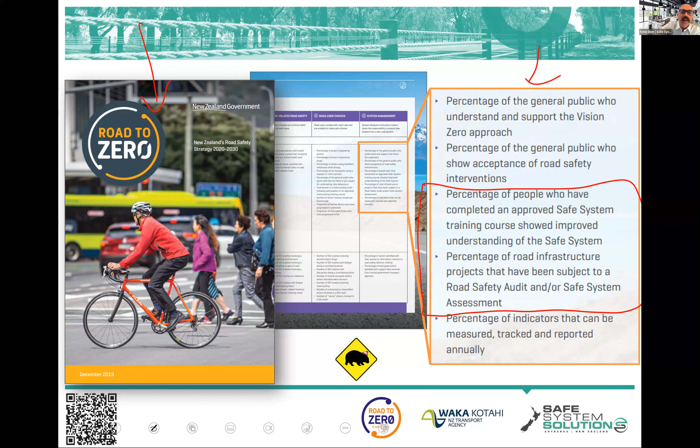A KPI is the percentage of people who have completed an approved safe system training course and showed improved understanding of the safe system. This is one of those, and you're hopefully going to show improved understanding of the safe system. Another is the percentage of road infrastructure projects that have been subject to a road safety audit and/or safe system assessment. Now we've combined those in New Zealand, so essentially subject to a safe system audit. Literally, a KPI for the New Zealand government is how many projects are being subject to this assessment methodology that we're going to be learning. You are then going to be applying it, and you'll be out there doing it on these road infrastructure projects. I'll explain that shortly.

There's a Wally. There's my only help for you in this course associated with Wallies. Wally count is 1. Keep an eye out for future Wallies.

So I mentioned the safe system. You saw it there as a key thing within the New Zealand government's road safety strategy. It's been adopted by local governments across New Zealand. Waka Kotahi operates under the safe system philosophy. But what is the safe system philosophy? Like most people I talk to in New Zealand will say, oh yeah, I know the safe system, and they've got a few key points they can rattle out. But I want to dig a little deeper into this and try to really understand that philosophy, what it is.

To do that, I'm going to take you back in time. We're going to go back to the early days and the first adoption of the safe system in New Zealand, like this time that the New Zealand government said, yeah, okay, we're going to adopt and operate under the safe system approach to road safety.

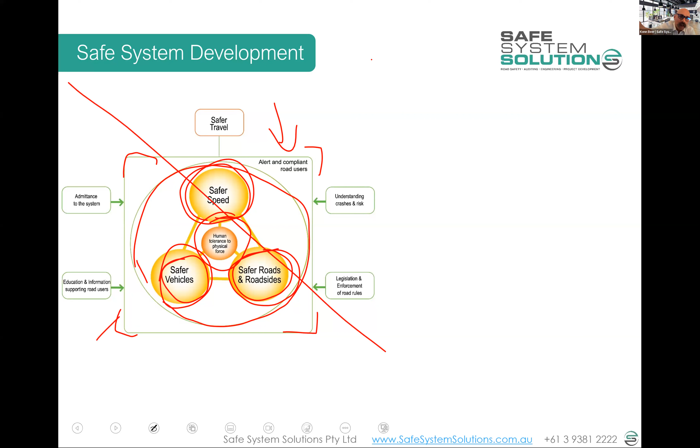So anyway, that got thrown out after a few years, and all of these other ones emerged. New Zealand was on the front foot of this and didn't really accept that from the start, and then we saw lots of other diagrams of the safe system appear.

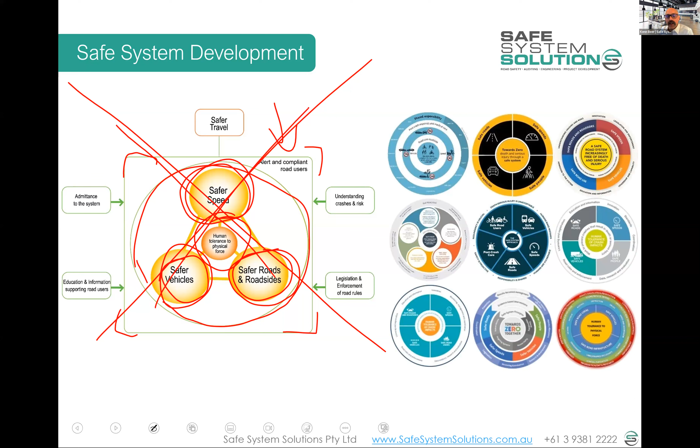I'm going to just talk briefly to the current New Zealand diagram of the safe system approach. I want you to think about the principles underpinning the safe system rather than the specific wording. We do have a little quiz coming up, you're not marked on it, but it's testing you. It won't be the exact same words, but it'll be the principles. Let's have a look at this.

We see the principles around the outside here, and I'm going to talk to these briefly because they are really solid, world's best practice principles of the safe system, or sustainable safety as termed in different countries, or vision zero planning and these sorts of things. But let's call it the safe system here.

We strengthen all parts of the road transport system. We are thinking holistically here about the transport system. But this next one is a big one.

We design for human vulnerability - that is the biomechanics of injury of humans. In this course we're going to delve into that, so you understand different crash types, speeds, angles, road users involved, and what we would expect the outcome to be for those road users. So you're going to become a bit of a biomechanics of injury person and analyst.

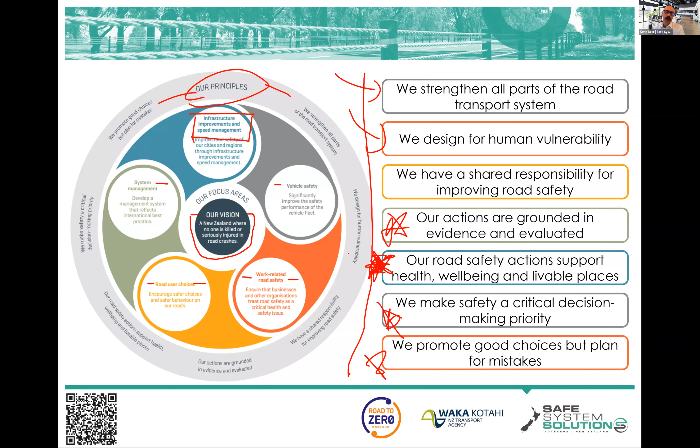Here's a little thing to alter your perspective of your job. Your job has an energy management component to it. So you should be trying to manage kinetic energy in crashes. That's an interesting take on how we do things.

But let's just explore this. I'm going to talk a little bit about safety culture, and then I'll give you some stuff to do. Let's jump out of roads for a second, let's jump to another industry. We're going to go into production of widgets in manufacturing, some sort of widgety something we're making.

Back in the day, it was a pretty open system. They had lots of workers coming in, they'd get kids off the street, give them a bit of training, then tell them to clean the machines. They'd get workers, give them a bit of training, say you do a couple of days of training on how to use this and then you're into it. We'll give you your ticket to work on this machine or whatever it is. But the whole area was quite unsafe.

It had machines that would have open crushing mechanisms and cutting, and we would see people crushed and arms ripped off and the like, and people killed in these machines.

And when they brought people in, they told them it was dangerous. They absolutely said it was dangerous, and said so you have to act safely. It's all about you, you've got to take responsibility for your own safety. That's what we call a pathological safety culture, where it's up to everybody to protect themselves the best they can in an unsafe system.

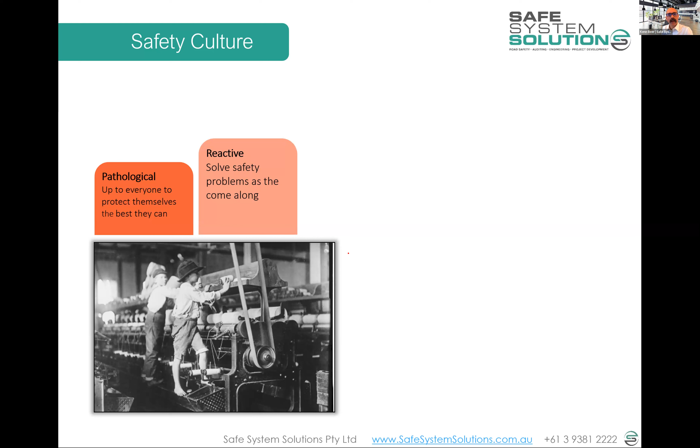Then the economists get on board and review all of these factories, and they say, well, you know what? If we were to implement these safety improvements across all of these machines, we would actually make more money, because we'd have less downtime, less payouts to the families of injured and killed workers, and we'd be able to produce more widgets. And they find this nice balance where you just kill and seriously injure enough that you're still producing what you need, and work out a thing called a benefit cost ratio to find that balance.

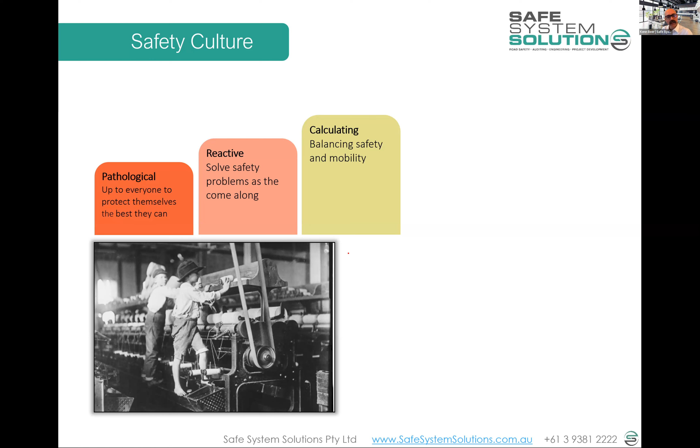Then you step up from that in a safety culture ladder to what we call a proactive safety culture, where it says, well, no, we need this very high level of safety, and we will allow you to produce widgets up to that safety performance level. If you go more unsafe than that, your risk goes above what we've deemed the very safe level, and production will stop until we're brought back into that envelope. And then you need to maintain that high level of safety through maintenance of the equipment and systems, but also maintenance of the culture and the like.

Now, if you look at the way we operate the road and street transport system in New Zealand, from a safety culture perspective, we really have elements of all of this. We've certainly got an abundance of pathological safety culture, where we're giving licenses to young people and saying it's dangerous out there, you've got to act safely the whole time, safety is your responsibility, right? And we're sending them off into an unsafe system, with them being the ones we say are responsible for safety.

Okay, we have reactive, and we certainly have been treating a lot of areas that have crashes, and we continue to do that. Calculating is in there, and that's very much entrenched in decision-making culture in New Zealand around road transport - this idea that we have to kill and seriously injure a certain amount of the community in order to move people and goods around the network.

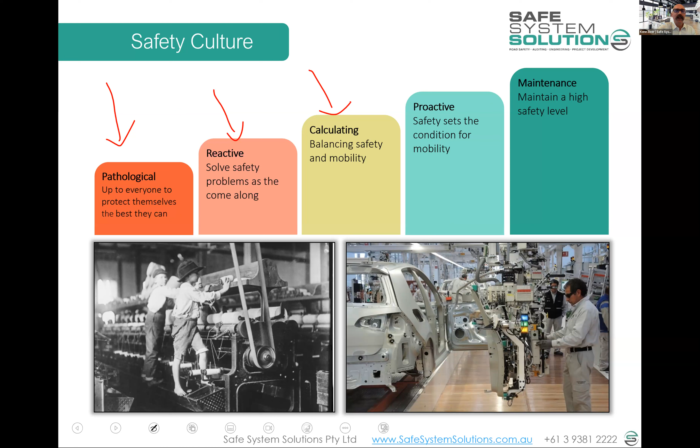Well, you want to sort of counter that, and there is a lot of countering that coming about in saying, well, no, we need to move people and goods around, but we can do that safely. There are proactive elements in there. We're seeing more and more emerging, and that is really where Safe System sits - in this proactive and then maintaining culture.

We see things like new motorway roads have continuous barrier systems throughout the roadside and median for the full length of it. It's not calculated on a BCR perspective. It's not waiting to see where people run off the road or have head-on crashes and putting short lengths of barrier in there. No, it's saying from the start, we need it to be inherently safe from that perspective.

And that's what happens, right? If you ran a traditional BCR economic analysis method over that, it probably wouldn't come out well. But I always give the analogy of a new high-rise apartment building with balconies - you don't build that and then just wait and see where people fall off and then put a bit of railing on those balconies, or go, oh well, actually it's higher risk on the outside of the curve of the balcony, so we'll just put the railing there. No - it just says it's unsafe.

Without railings, we put railings. And that's the sort of proactive safety culture we're looking for. So there's good stuff there.

Back in the day, school speed zones were very much proactive. You run a standard economic analysis on school speed zones - they're a disastrous investment in an economist's eyes. They're just bad all round. There's just nowhere near enough kids killed or seriously injured in their minds. But how grotesque is that?

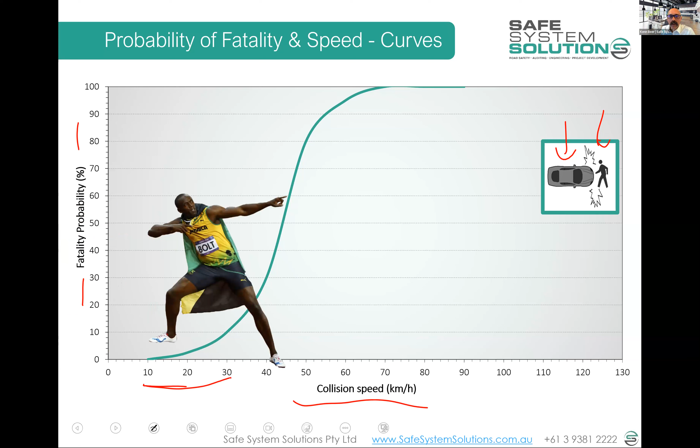So this is a graph for all community levels, and passenger vehicle striking pedestrian. You can see there around 10, 20, 30 kilometers an hour, most of our community will survive when struck at those speeds. It's not going to be friendly, but they should survive. A great man, he comes up a little higher on the curve because he's built like a fridge and can withstand some force. But you see it sort of exponentially goes bad for our community around that 30 kilometers per hour - it gets really bad really quickly after that point.

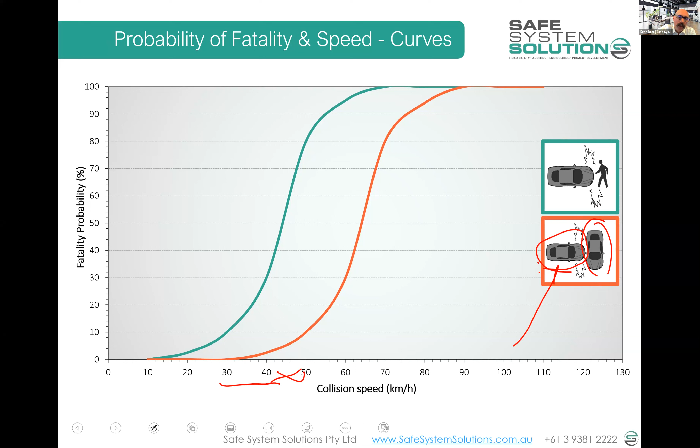For side impact, right angle, we talk about that vehicle as the bullet vehicle - the one that does the damage in a crash. This is the target vehicle. So bullet vehicle speed down here, we see around 30, 40 kilometers per hour when we get that right angle T-bone crash, it's generally survivable, even up to around 50. As we go beyond about 50, it gets really bad, really quickly, with huge increases in the proportion of our community killed as a result of those higher speeds.

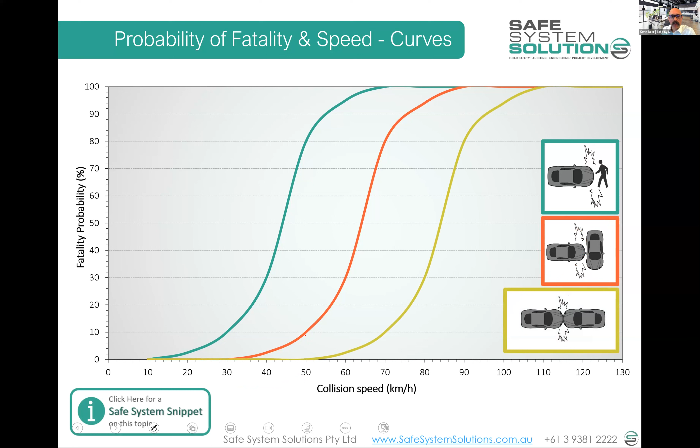For head-on crashes, we see that around 50, 60, 70 kilometers per hour, which is the speed of each vehicle, sometimes people say to me, oh, so it's 70 kilometers per hour, that's 140 kilometers worth of force. And I'm like, no. Well, only if you were standing in the middle and they squashed you, or only if you're in a tiny smart car and a massive truck hits you and pushes you back. It's a 70 kilometer per hour crash.

It's the same as running into a brick wall at 70 kilometers an hour, in the sense that assuming these are same mass, same speed vehicles and they hit head on, the occupant of those vehicles goes from 70 kilometers an hour to 0 in that short space of time. There's a good Mythbusters episode on that, crashing cars into each other and into brick walls with accelerometers, proving that point.

Now, in the PDF slides, which you can get from the Learning Management System, as Loretta's going to show you near the end, you could click on any of these little safe system snippets, it takes you to a link and gives you more information. Sometimes there's videos to go with it. If you're interested in delving into this a bit more, we point you at that.

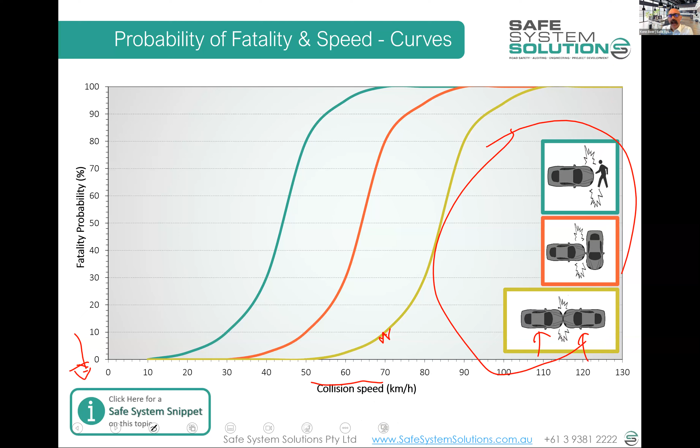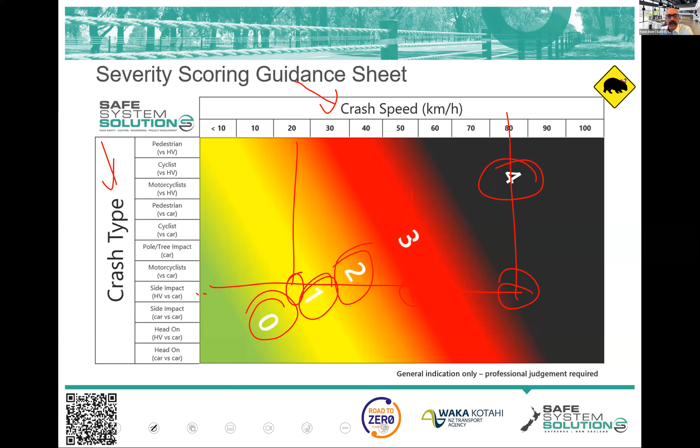I'm going to give you a break shortly. I just want to cover off another couple of things here. This one.

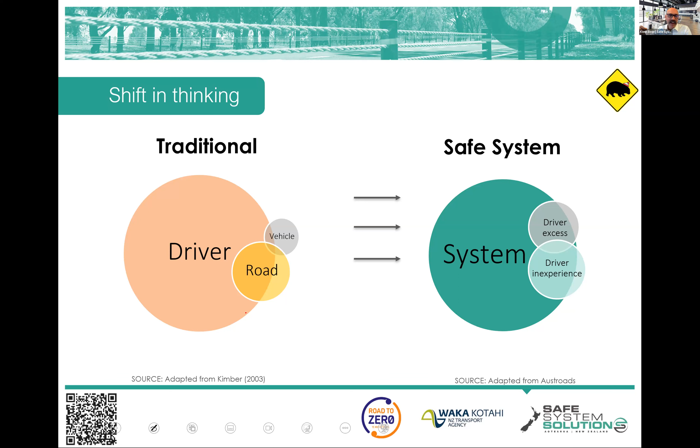Now, there are bubbles here that Austroads put, it's adapted from Austroads, which were these driver excess, driver inexperience, and bits sitting outside. Now there's another area of debate, like okay, if somebody drives at 200 kilometers an hour through a residential street, is that even something within our system? I would just say it's a system failure. How on earth have we let a car be able to do those speeds in those areas? That's insane. And the technology is there to stop that happening. That's, technology is not the issue. It's sort of like a mix of sales and marketing and public opinion and all of these weird little nuances.

But from a very simplistic perspective, we could make it so that absolutely just can never happen. It can't happen, the vehicles will not let that happen. Driver inexperience is like not having the absolute basic function of how to use a vehicle that you're using. No, and we're not talking about anything advanced here, just absolute basic function. But we want to think about system failures, and what can we do to address the system?

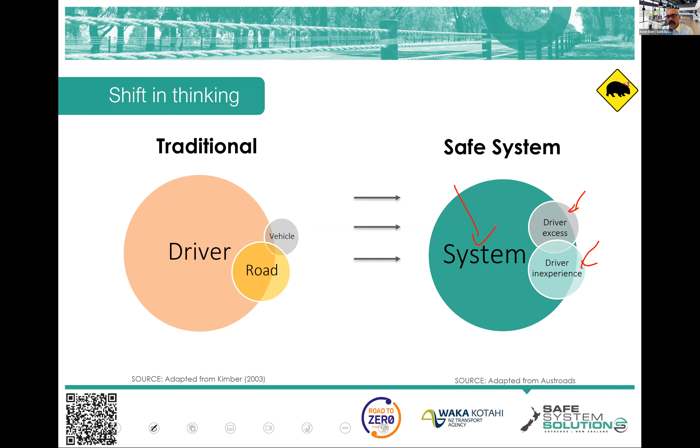Within that, we talk about slips, lapses, mistakes, unintentional violations, and deliberate violations.

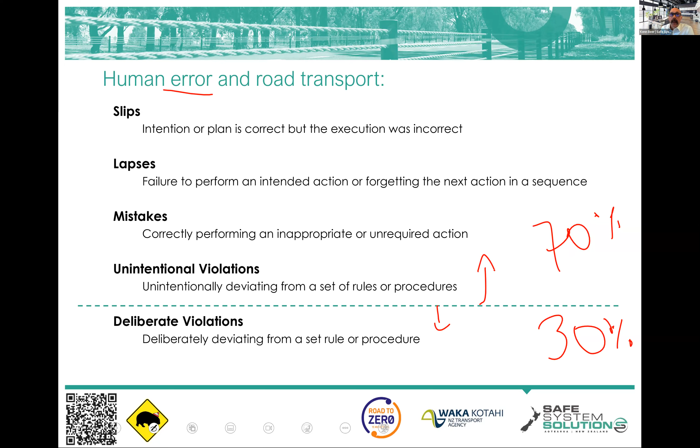I think there might be a question that's come in. Is deliberate include drink driving, etc.? Yeah, this is where it gets a bit nuanced. I think they drew a line at some sort of intoxication level, which was not just a bit over, which is up for debate. So a bit over seemed to be within what they categorize as above the line. And texting was also above the line. So whether that's a premeditated, deliberate violation is unknown. I think in the report, it was sort of like, the predominance of texting and the way people, when the text goes, the human urge to look at it is not considered a deliberate violating act. So it gets into some interesting details, lots of psychologists and human factors experts weighing in on those reports.

But the core of it is that there's a huge amount we can do just within the design, operation, and management of the physical infrastructure and the way we operate a road and street network that can have massive changes for everyday New Zealanders going about their business. They'll never know, but it can.

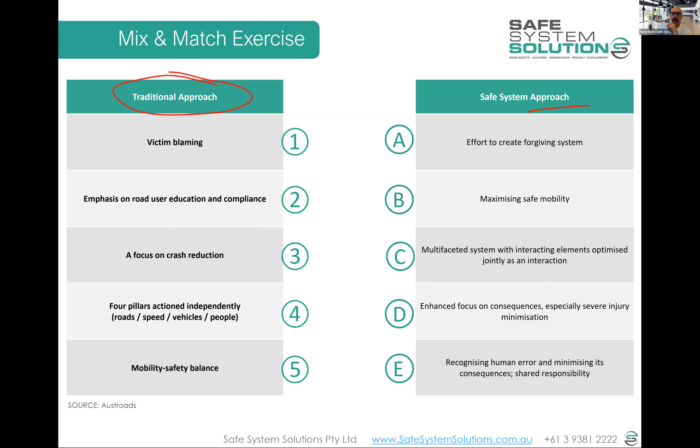Victim blaming, well we now, people won't say they were victim blaming of course, but where we were just able to point the finger and say there was a minor lapse in concentration and that caused it, or whatever it was. It's more recognizing human error, minimizing its consequence, and that shared responsibility. Emphasis on road user education and compliance, it's not being ignored, but it's more focused now on that effort to create a forgiving system. So crash reduction, we're thinking about the consequence of crashes and severe injury minimization. We had this very siloed 4-pillar approach: the roads, the speeds, the vehicles, the people. It's really understanding there's this multifaceted system, interacting elements, and we want to optimize it jointly as an interaction. That's a bit of a mouthful. And mobility safety balance to maximizing safe mobility, that's a little bit like that factory widget analogy I was giving, where we say, no, the safety sets here, and then we will maximize mobility within that safe envelope rather than balancing off.

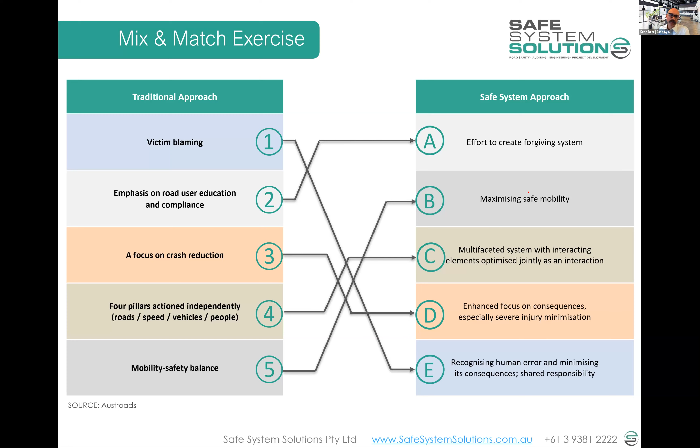Okay, let's have a quick little pop in here of some things. I'll give you a little bit of background on this. And sorry, I'm just checking where we're at.

Okay, I'm going to have to speed up a little bit, but that's okay.

So this is a central flexible barrier system in a narrow flush median, as you can see - a pretty newly installed system. It's 2+1, meaning 2 lanes in this direction, 1 lane in this direction, and then that'll swap at some point, so you've got that overtaking opportunity. This job took an extraordinary amount of time in planning, design, and development, because they kept hitting these hurdles and barriers - things that people said you can't do, for one reason or another.

Let's do a little bit of typing into the chat. What do you think some of those blockers, those hurdles, those reasons people put forward were for why this project to add this central median barrier in the flush narrow median - why they said you can't do it on this road? It was just a road that was basically 1 lane in each direction with occasional overtaking lanes separated by a center line, and this was the change they were making. Pop it into the chat - any ideas on what those challenges were? People were saying, you can't do it, I don't want this.

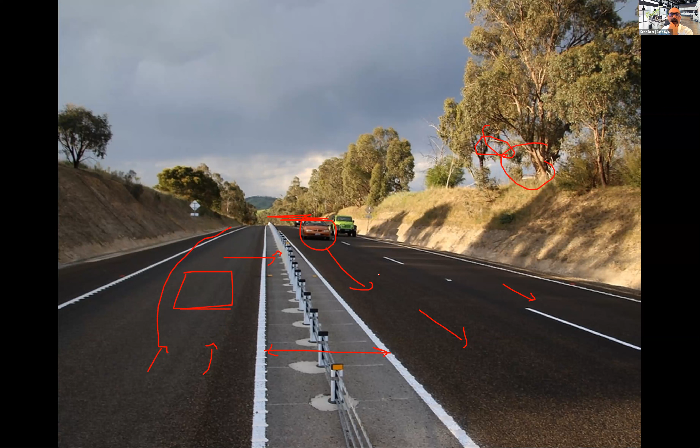So lots and lots of issues - enforcement: if this car was driving fast and the police car was on this side, how would they get to them? What if the house over here was on fire - would the fire truck have to go all the way around? The posts and motorcyclists - the list goes on and on. And you've identified a few of them, but there were many of them.

The thing is, this still isn't something that's done commonplace, so people aren't used to seeing this, and change is always fearful for people. So we see a lot of this come up. Our job is really to think about how we can facilitate this, because this is going to be a way, way, way safer outcome for our community.

One of the things we've discovered is that a traditional road safety audit actually caused more issues for these projects in a lot of cases, because a road safety audit's only mandate is to identify safety issues with the project once it's built, with the design. So all the road safety audit was pointing out was the risks - maybe a motorcyclist hitting this, the deflection of the barrier slightly into the oncoming lane, little bits and pieces like this. The audit's job was never to say, overall, this is a wonderful safety project - that's not the job. So we ended up getting reports that were kind of hampering our ability to implement these sort of things.

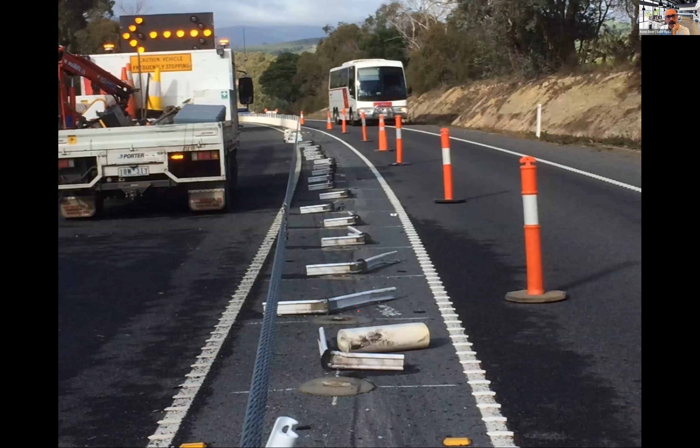That one did get built, of course. Then it got hit, because, you know, people leave their lane. And that was a really interesting one.

Somebody called up the regional office. They wanted to speak to the engineers that put this in, and they were expecting to get shouted at, as you usually do, except this person just wanted to thank them because they're pretty sure this barrier saved their life. They'd been driving this road for 40 years, they said, and it never had a barrier in the middle. This time it did.

Somebody came directly at me, and so they managed to capture that person and give them to the comms team. They made a little video of it, which we're going to put into the learning management system. You want to watch a little 2-minute video that talks about that, it's pretty good, it's pretty nice. It's very rare we get thanked for the work we do, because people don't know that they've been saved. But in these cases, they do.

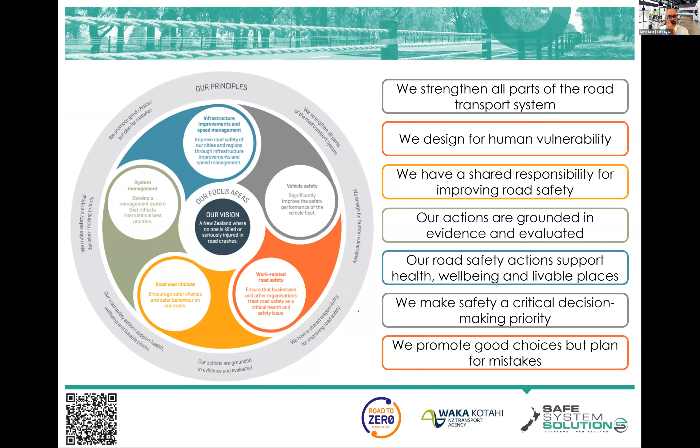So a couple of little things from me here as we go through these principles and elements of the safe system. The vehicles are playing a huge role in safety, right? We're seeing better safety features coming into vehicles, different star rating systems, and mandating of different safety features. Admittedly, the New Zealand regulations are lagging significantly behind a lot of the rest of the developed world, and I think there's a lot of improvements that can happen in that space. But we do know the vehicles are playing a pretty good role, and you can see some crash testing and vehicle safety features implemented into the vehicles which are proving pretty good.

But I do want you to be aware of the limitations here, for us as infrastructure people to sit on our hands and say, no, the vehicles are going to solve all these issues, we don't need to really change anything. Yeah, that's not quite right, on a number of levels. One is just to understand the limitations of vehicles.

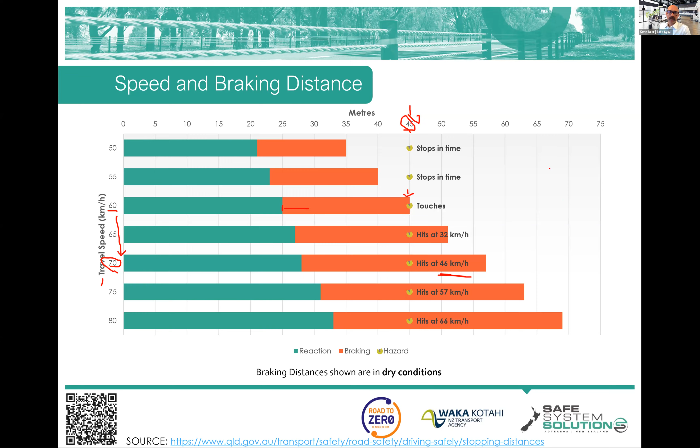And when you add into that those exponential charts we showed of the biomechanics of injury at different crash speeds, and you overlay both of these, we discover a fourth power relationship between speed and fatal injury outcomes, and a third power relationship between speed change and serious injury. So if that doesn't quite make sense to you because you were asleep in year 11 maths, that just basically means that small increases in speed magnify significantly to the highest level injury outcomes.

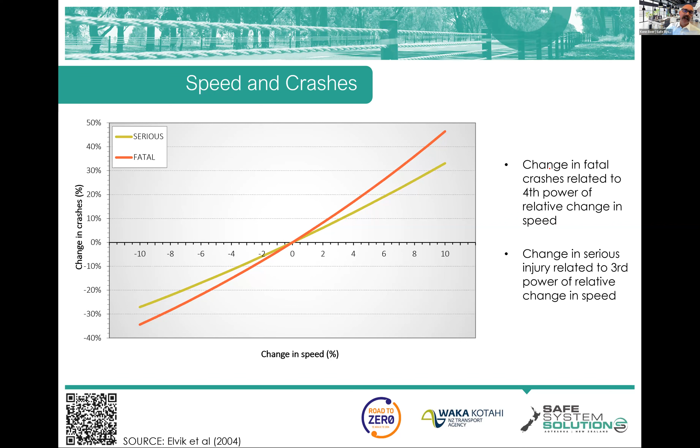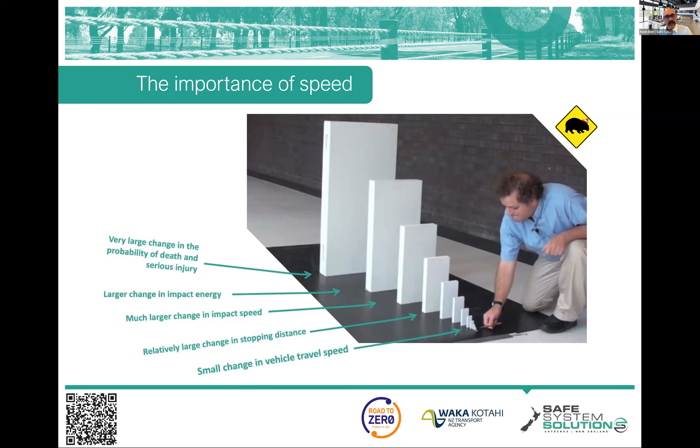I was updating the Austroads Guide to Road Safety Part 3, which is speed and speed management, and I chucked in this diagram just to illustrate the importance of speed in the overall safe system perspective. Basically, whatever road transport network you've got - whatever the roads, whatever the vehicles, whatever the people - you can have a safe transport system as long as you filter it through the correct speed.

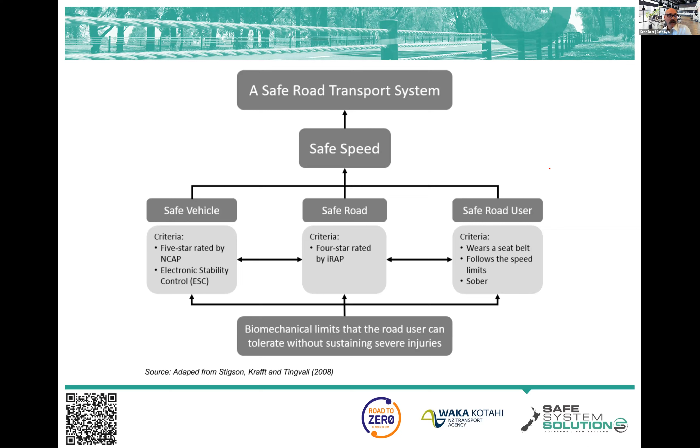You can have really bad cars, drivers who aren't wearing their seatbelts and other things, poor roadside infrastructure and the like - filter it through a low speed and it's safe. Conversely, if you have a really excellent vehicle fleet with high safety features, wonderfully designed roads that cater for this with great energy absorbing characteristics and no dangerous locations, and road users wearing their seatbelts, you can filter it through a very high speed and still have a safe transport network. In fact, racetracks are a very well aligned safe system environment, like car racetracks. Anyway, just the importance of speed.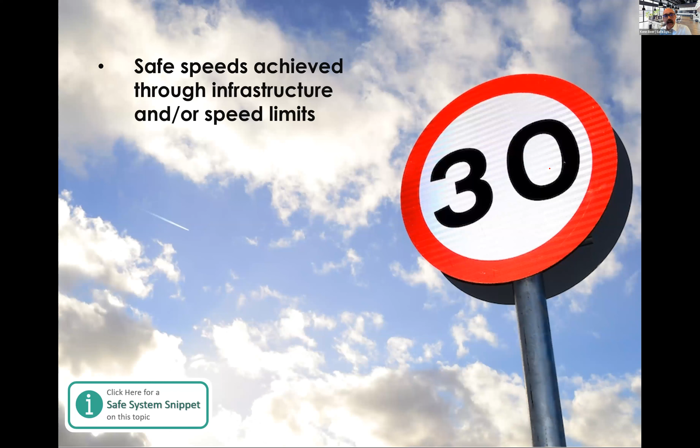Safe speeds, though, we can achieve through infrastructure and/or speed limits. Explaining why speed limits are in place can assist in their acceptance and compliance - that's an interesting one. Protection of vulnerable road users is generally well accepted. Urban speed limits are generally an easier thing to do - still hard, but rural environment speed limits still cause challenges, as they are playing out very much in New Zealand at the moment, with some political challenges, as you're all very aware of no doubt.

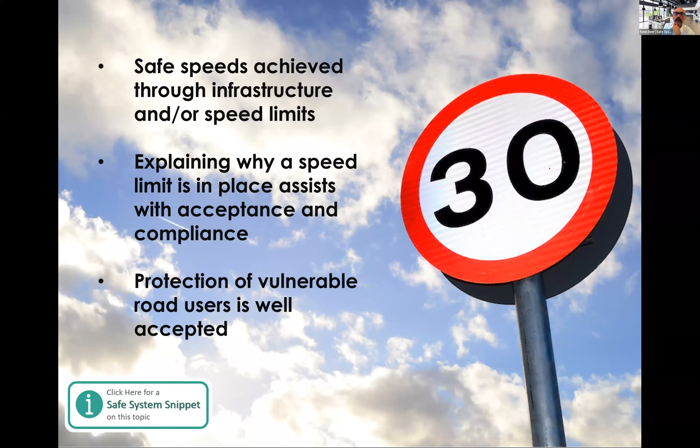But we are playing out this interesting space where we're managing speed, and we have some technology that we can use - so site-activated speed limits on major roads. These are RIAWS, sometimes called rural intersection activated warning signs or speed signs, where a speed limit activates only when there's a vehicle coming out of a side road or entering into a side road - so only where the risk, the conflict, is present at that time. I think these sort of things are a stepping stone into more appropriate speed management across the network.

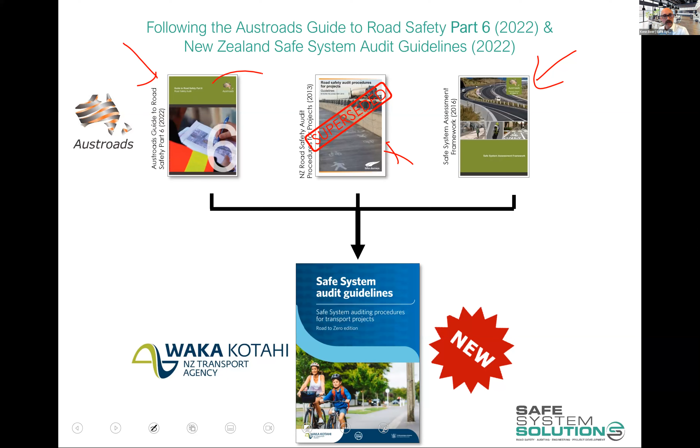So we also had the Safe System Assessment Framework, and then there's the old 2013 Road Safety Audit Procedures for Projects, which is the old New Zealand audit guidelines. So taking bits of each of these, and a few other little bits and pieces, we created the Safe System Audit Guidelines, which actually does, in my opinion, jump ahead of the Austroads document, and it's a really nice process. A safe system audit is this overarching encompassing of a road safety audit and a safe system assessment.

So what we're going to be teaching you is really how to do a safe system assessment, and then how to do a road safety audit, and then how to combine those into one package. You'll be able to do both a safe system assessment and a road safety audit, and combine them as a safe system audit. I apologize if terminology is a bit confusing during this transition, but I'll refer to safe system audit, which really includes a safe system assessment and a road safety audit.

So a common misunderstanding of a safe system audit is that it's a check against standards. That's not what it is at all. I shouldn't say at all - you might check if it's meeting standards and guidelines, but there's plenty of things that meet standards and guidelines that present death and serious injury to our community.

We could have standards and guidelines that are old. We could have standards that have never been thought about in the context you're about to put them in. We could have combining standards and guidelines together - as isolated things they're fine, quite safe, but put them together in the same spot and oh my God, we've got a dangerous situation. So there's a whole lot of reasons why just meeting what is documented may not be safe.

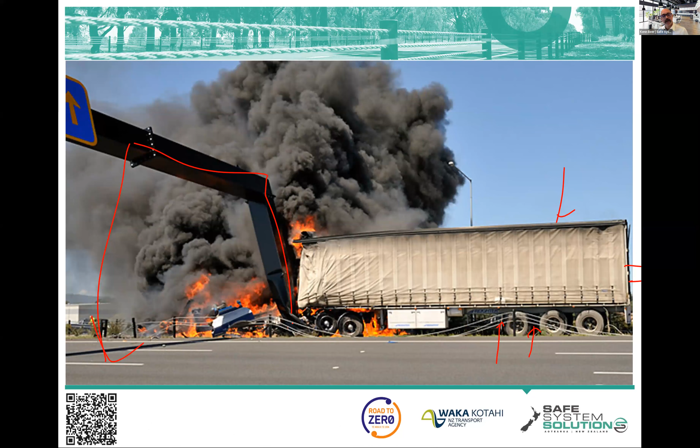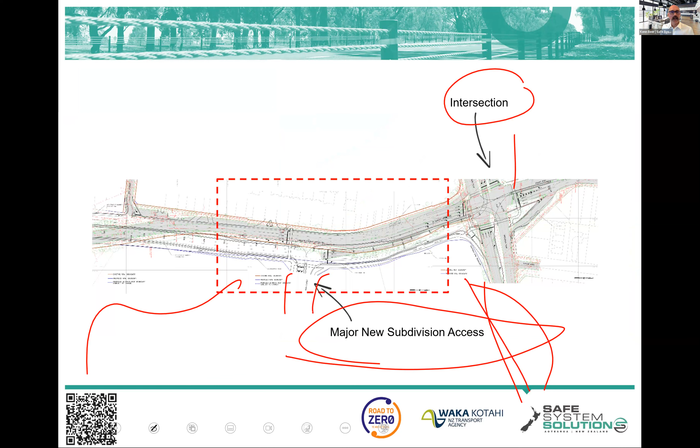Here's another example. So here we've got a new duplication happening and a really big new major subdivision happening all down here - it's huge. Not across the road, but yeah. I'll zoom in on this a bit. You can see there's an intersection up there, existing, and a big new access road in here to the new subdivision, which doesn't exist at the moment. So let's zoom in on that.

So you can see here Main Street, and they're signalizing here. You can see if a vehicle is traveling along here, maybe it's a 60 zone, maybe they're going 65 or something, ticking along and continuing along straight, wanting to continue straight along here, and oh, whoa, I'm in a right turn lane. That's what we refer to as a trap lane - wonderful naming of that, whoever named it, because it's exactly what you feel.

You're driving along and all of a sudden you're in the turn lane. You don't want to be in the turn lane. You didn't move into a turn lane, you're trapped.

We know very well that we're going to have sideswipe and rear end crashes around here. Does this contravene standards and guidelines? Well, not really. It's discouraged, but it doesn't say you must never build a trap lane, because these jobs are super hard. They're dealing with services, properties, constraints, traffic modeling, cost implications, and you name it. Super hard to build and design something like this. So the designer here would have known they're building a trap lane, but they're going, well, I can't, I'm stuck here. I have to do it because I can't afford to widen. I've got this and all these other constraints, and on balance, I'm just going to do it.

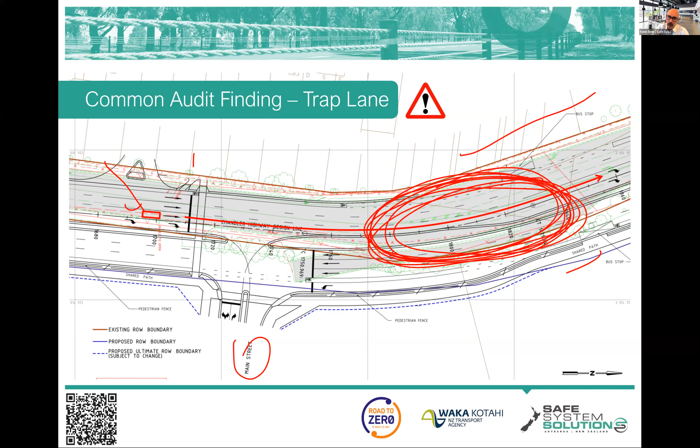Okay, I'll play it once more, or a couple more times. I'm seeing some good answers coming in already. We've got a group of natural safe system auditors, I think. I'm seeing some really good answers coming in here. Everything I'm seeing in there is worthy of investigation, and you can hardly ever do this.

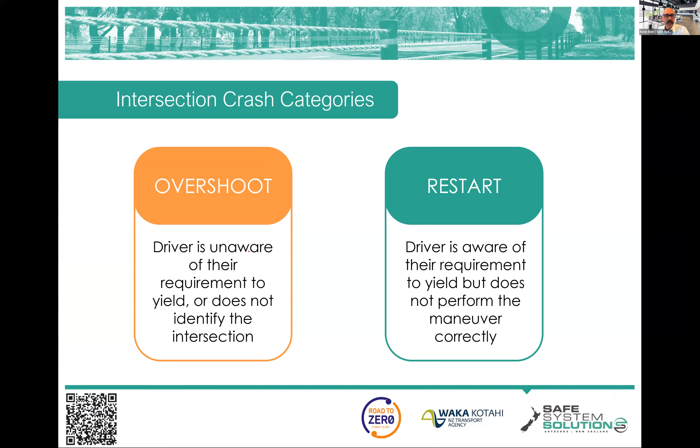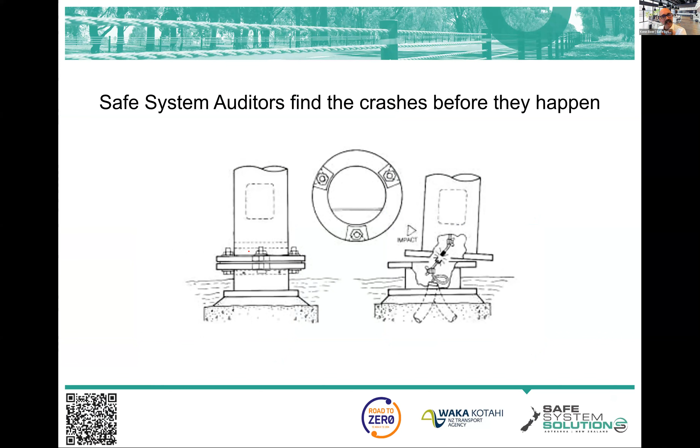Now, overshoot and restart are categorized for you in your notes—I've already explained those. But we saw the slip-base pole here. That light pole was designed to break away on impact, which lessens the severity of the incident when it occurs. So slip-base poles are pretty cool—they do an amazing job in terms of breaking away when struck.

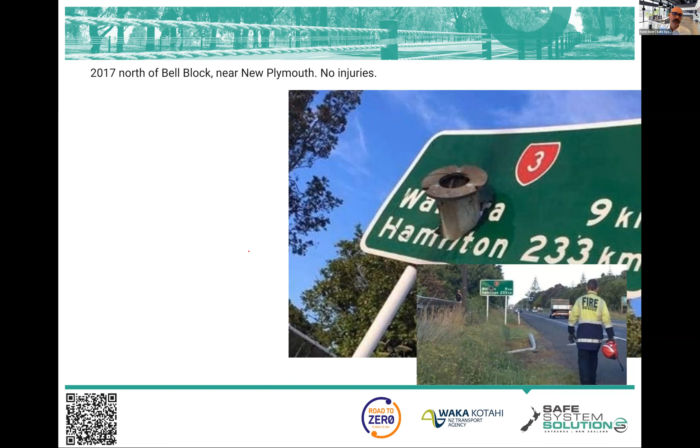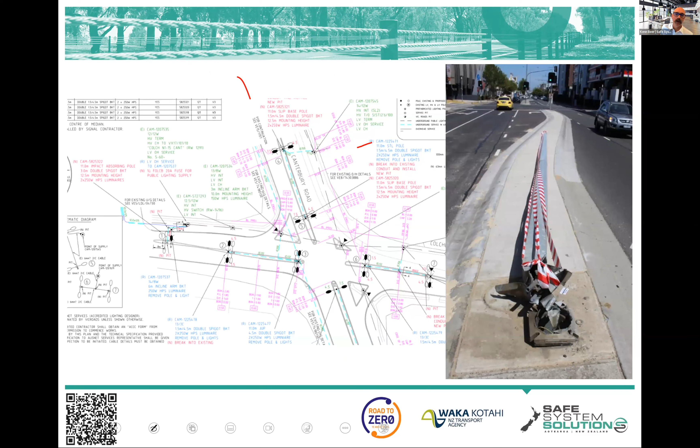So there's good safe system in action. As an auditor, you might be given designs that include decisions on light poles—are they going to be rigid, or are they going to be slip-based? You might see this sort of stuff and have to read into the details to work it out, or make sure you're with people in your audit team who can help you understand what they're going to build, so you can ask logical questions.

If we were in this environment with these light poles, and we were worried about vehicles leaving the road and hitting them, what if we decided to make those slip-based, breakaway on impact? Could there be any other issues with that? We're here in an urban environment—though I think this is during lockdown, so it's actually quite quiet. Someone mentioned pedestrian strikes, absolutely, well done there—we need to think about where the pole will fall, and it could fall onto other road users.

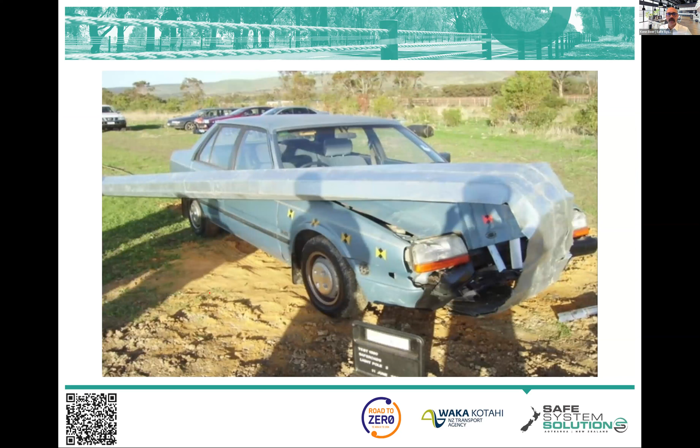So the rule of thumb is that on high speed roads you wouldn't use rigid poles, you'd use slip-based poles. In low speed urban environments with pedestrians and lots of activity around, you'd use rigid poles, because the speed of vehicles shouldn't be high enough to create that energy transfer to the road user. In between, there's another type of pole called an impact absorbing pole—it crushes and contains everything within an envelope, so these can be used in medium speed environments. On the left in the video here is an impact absorbing pole.

It's probably a higher speed environment than I would use an impact-absorbing pole. I think it's interesting, but it shows you how it works. It hasn't fallen onto the carriageway, it sort of folds back on itself there.

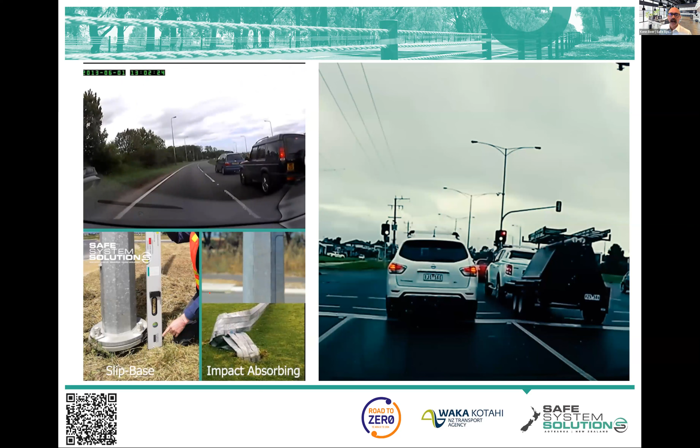Impact absorbing. On the right here, we're seeing a slip-based pole. So the whole thing will come out and come down, and you can see how that falls.

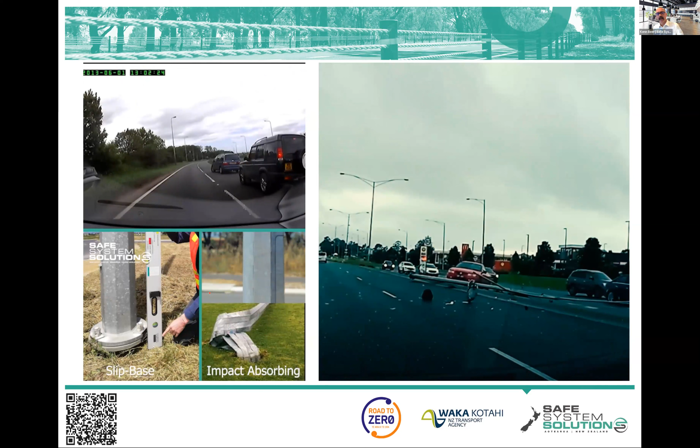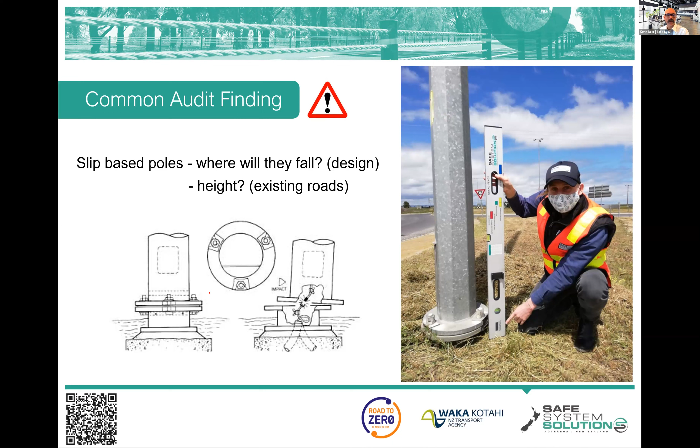So as an auditor, we will be looking, in a design, what are they going to use? Where's it going to fall? Is there danger for the occupants of vehicles? And then the existing roads or post-opening audits or the like, we'll be looking at things like the height. Okay, they've put a slip-based pole in. Is it the right height? If it's too high, vehicles are just going to snag on it. And if it's too low, it kind of just doesn't quite function the way we want. It's not as bad, but...

Okay, so a safe system audit, it's defined in the safe system audit guidelines, which are on the Waka Kotahi website, and we're putting them into the learning management system. But it is a formal, robust technical assessment of transport safety.

So it's a risk assessment. It's done by independent and qualified teams. So you can't audit your own design. You can't audit the design that you're the project manager of. Right, and you have to be qualified - you have to have done this course and have that qualification.

But we can do these safe system audits at different stages along a project. You can do it at the early stages when it's a concept design, they're just starting to design things up, or they've got a bit more design, a bit more meat, preliminary. At the details stage, you can do this sort of process during roadworks, although there's some other stuff associated with that, and post-construction, so pre-opening or post-opening.

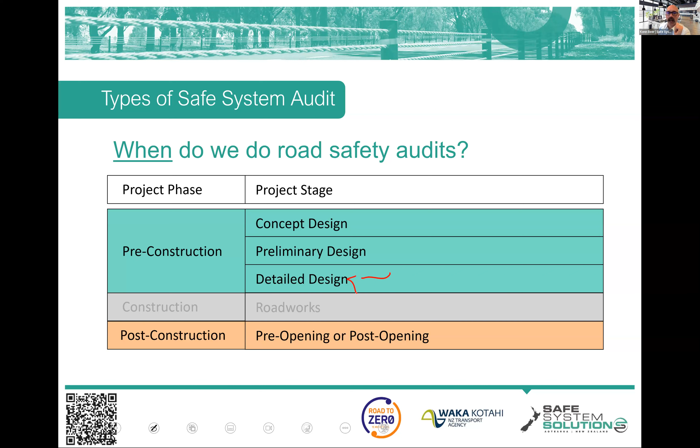What a wonderful comment, thank you. The earlier, the better. And that's something that we will stress throughout this. The earlier, the better. Because once you're down here at detailed design, people just do not want to change, right? So earlier is better. So feasibility stage, big picture planning type projects.

Thinking about land use stuff. How are people going to get from up here down here? Is this a good intersection form? Like, could we change things? Is this going to be confusing? Big picture stuff, right? Planning stuff.

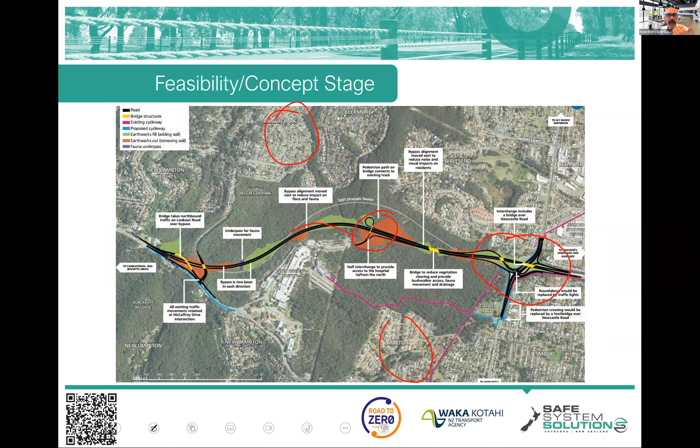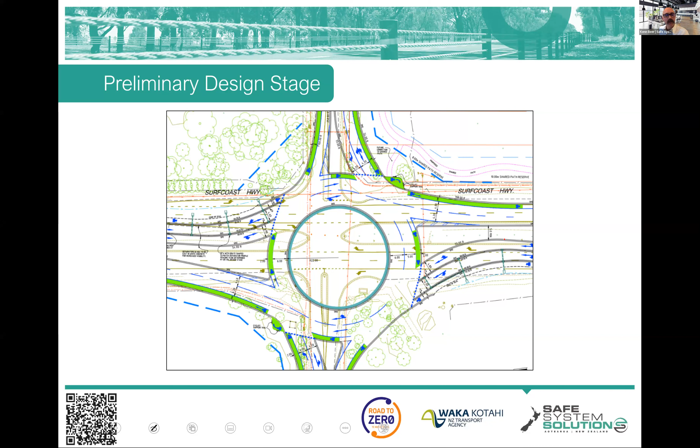Then you get into preliminary. You've got a bit more detail, a bit more meat on it. Could be on a survey base, could be on an aerial base, and you're looking at how this all functions and making choices. Then you get into detailed design.

And we've got the long section, the cross sections. We've got the pavement plans, the signs and lines plans. We've got the signal phasing. Okay, this is big - like, you sometimes get hundreds and hundreds of A3 pages to pour through, and you're looking at this and you're trying to work it out.

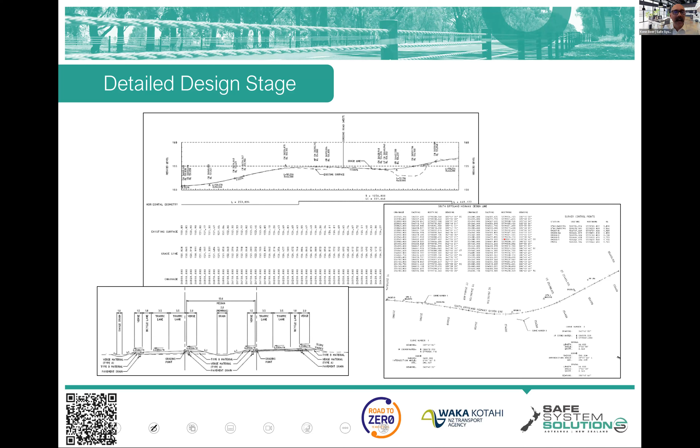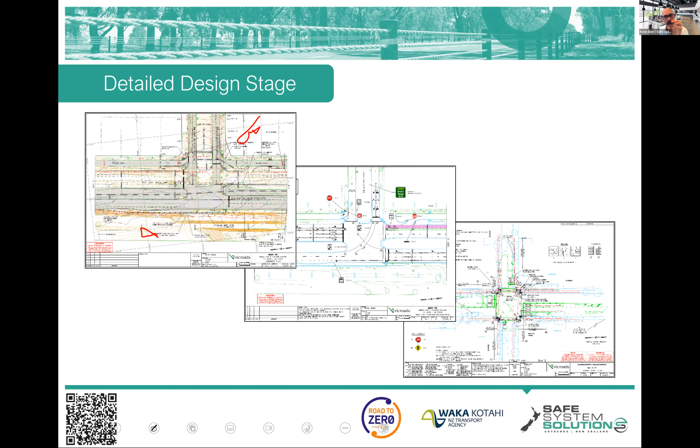You do this in a team. So if you're not somebody who can really understand what's going on in a plan like this, you make sure you're part of a team where there are people who can, and you can still ask really good questions and be contributing to the audit, saying like, oh, well, how are people going to get from over here to over here now? And these sorts of questions are great, but you do need that technical aspect to it as well. So you need people in your team who are really technically astute in these sort of things.

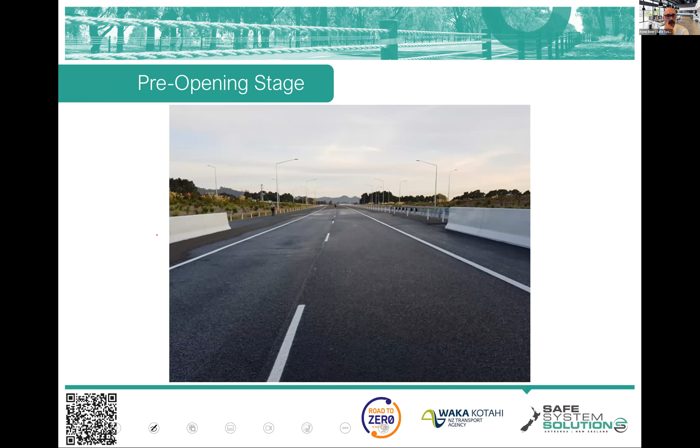Pre-opening, before they cut the ribbon, checking everything, anything that can be done, that's where your roads are at the stage where there's no traffic on it. Most of the time we're dealing with a lot of brownfield sites, so they're kind of live to traffic anyway. And that's where you're in more post-opening stage audits where it's live to traffic as they were building it. They managed it and they continued on.

And finally, there's things called thematic audits where you can have a dedicated cyclist or a motorcyclist, or you walk through it, or you go in a wheelchair through, or get somebody in a wheelchair to go through it, and you're really thinking about that specific road user. We'll talk a little bit more about these later on. Okay, over to you, Loretta.